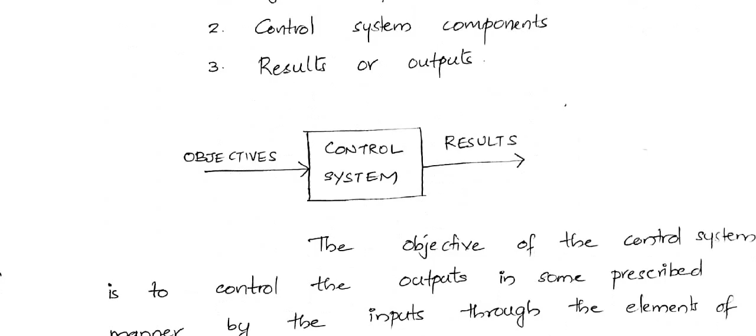Before going into the basic components of a control system, let's see what is a system and what is a control system. A system can be defined as a collection of components or elements that are connected together in a sequence to perform a specific task or a function. So that is basically a system. In a system, if the output quantity is controlled by varying the input quantity, then that system is known as a control system. So how will you define a system?

We can define a system as a collection of elements or components connected together in a sequence to perform a specific task or a function. And in a system, if we are varying the output quantity by varying the input quantity, or if we are controlling the output quantity by varying the input quantity, then the system is known as a control system.

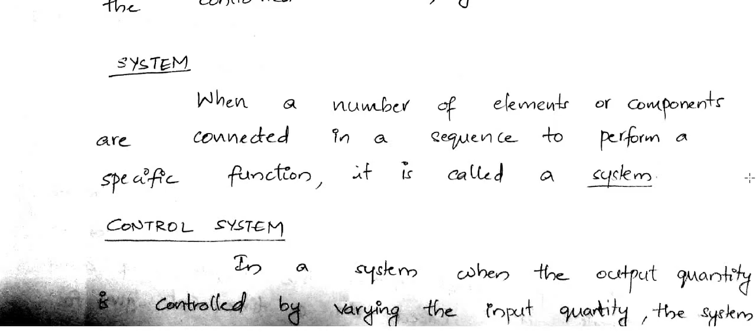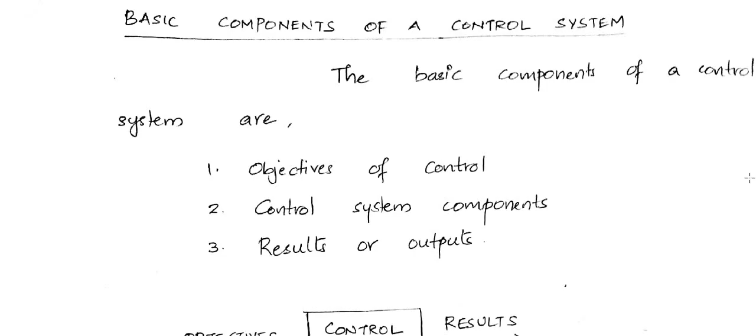So now let's see what are the basic components of a control system. A control system has three important components or three basic components, which are objectives. Objectives are nothing but the inputs. Then secondly, we have the components of the control system, and finally the results or the outputs.

So we have a control system, and we are applying the objectives, or the inputs, to the control system, and from that system we are getting the output or the results. So the basic components of a control system are objectives, which are also known as inputs or actuating signals, then the control system components, and finally the results or the outputs. So these three are the basic components of a control system.

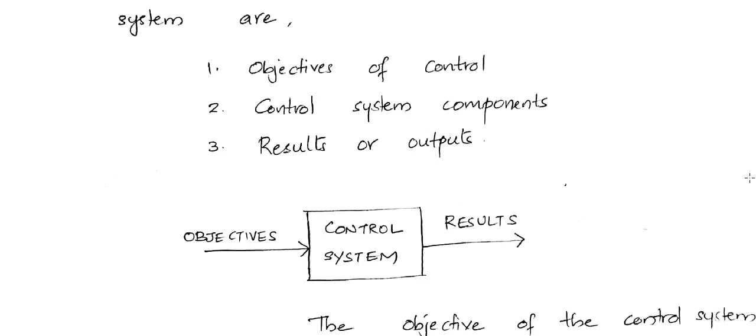So we have seen what is a system, what is a control system, and what all are the basic components of a control system. Now moving on to the next part, applications of control system, or examples of control system. You may be asked to list out the different applications of control system, or write the different examples of control system. For both, you can go for the same answers.

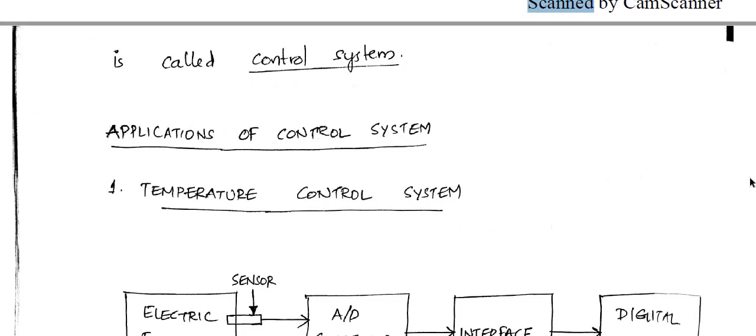First one, a temperature control system. So here you can see an electric furnace. We are trying to increase the temperature of that furnace, or we are trying to control the temperature of that furnace. Through a relay control circuit, we are applying AC. So we are applying that voltage to the heating element of the furnace. Obviously when we apply that supply, the heating element will start to heat, and as a result its temperature will slowly increase.

We have placed a sensor over there to sense the temperature, and the temperature is being converted into a digital quantity so that we can display that temperature in the digital display. This is some sort of control system we have, but we normally say that this control system, this temperature control system, is an open loop system. So why do we say that it's an open loop system? Because we cannot automatically correct the temperature.

So that's why we say it's an open loop system. Actually, there are two types of control systems: open loop control system and closed loop control system. We'll discuss all those in detail. So this is a kind of open loop control system. We are just applying AC supply to the furnace through a relay. When we supply that AC, the temperature of the heating element will slowly increase. With the help of a sensor we are measuring that temperature, and it will be in analog nature, so that is converted into digital with the help of an analog to digital converter, and that is being interfaced to a digital display so that the digital value corresponding to the temperature can be displayed.

See here, this is a kind of closed loop temperature control system. The difference we have made is we have added a controller over here. To the controller we will give the desired temperature, or the reference temperature. So this is the temperature that we need in the electric furnace.

The controller also accepts a signal from the furnace side, which represents the actual temperature in the furnace. The controller will compare the actual temperature in the furnace with the reference temperature we have given. Based on the comparison, the controller will generate an error signal, and that error signal is fed back to the relay circuit, which can be used to switch the relay on or off.

Suppose the temperature in the furnace is higher than the desired temperature. The controller will generate an error signal, and that error signal will be used to switch off the relay. If the relay is switched off, then automatically the supply to the heating element will be switched off.

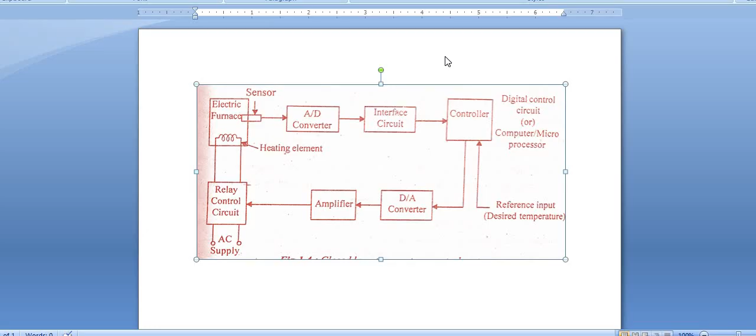So slowly the temperature in the electric furnace starts to reduce. After some time, when the temperature becomes lower than the desired temperature, based on that comparison the controller will again generate an error signal, which is fed back to the relay circuit, and now this signal will switch on the relay. This automatic switching on and off of the relay ensures the temperature in the electric furnace stays at the desired value, keeping a constant temperature in the furnace. This is how we make a closed loop, or automatic, temperature control system.

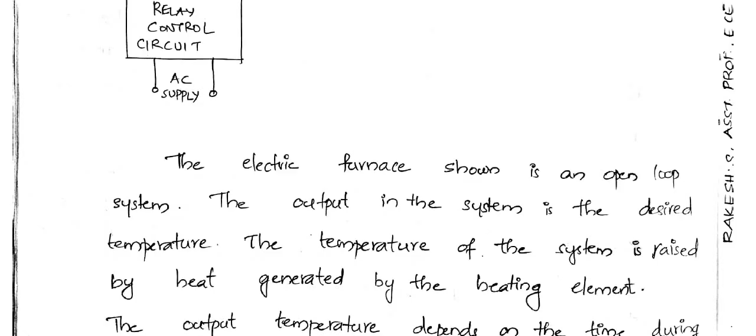Now we'll go to the second example or application. This is something you all know - a traffic control system. Our normal traffic control system is an open loop system, because it's based on a timer. Based on the timer, it will open a particular lane and close other lanes, and after a particular amount of time it will open the next lane and close the others, likewise.

We can convert this kind of traffic control system to an automatic, or closed loop, control system by measuring the amount of traffic in a particular lane, maybe with the help of a camera. If the traffic in a particular lane exceeds a particular limit, we can open up that lane and close the other lanes. Likewise we can convert the normal traffic control system to a closed loop control system.

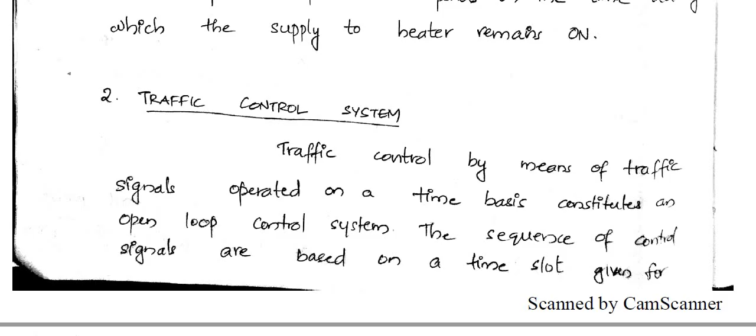Steering control of an automobile: the movement of the tires is done with the help of a steering wheel. We control the steering wheel, rotating it, and based on the direction of rotation, the tires or wheels move accordingly. So we are controlling the direction of the wheels, and that can also be considered as a control system.

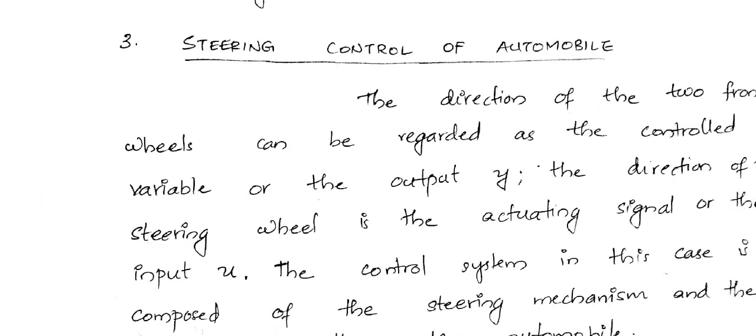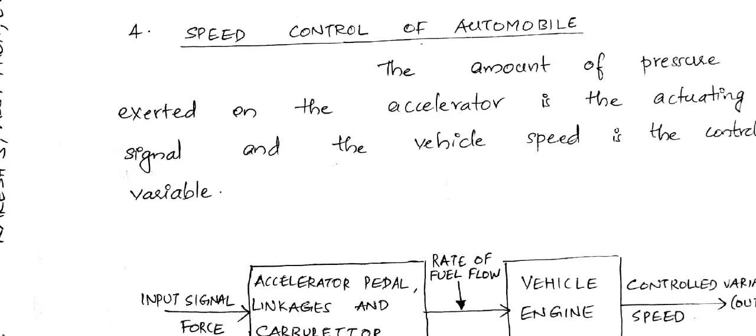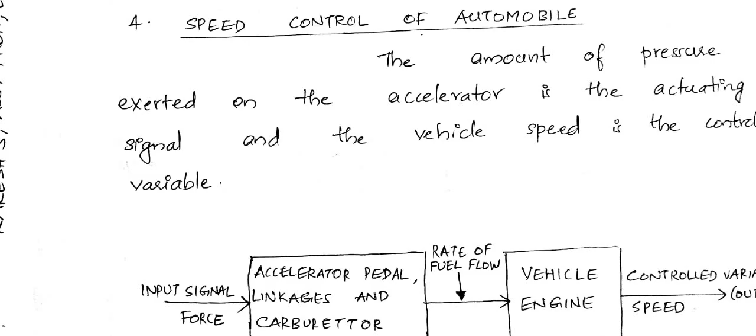Then, speed control of an automobile. How do we control the speed? It's done with the help of the accelerator - we press the accelerator, applying a force on it, which changes the rate at which fuel flows. Based on that, the speed of the automobile changes. So in this case, the input is the force we apply on the accelerator pedal, and the final output, or controlled variable, is the speed of the automobile. Controlled variable means the output itself.

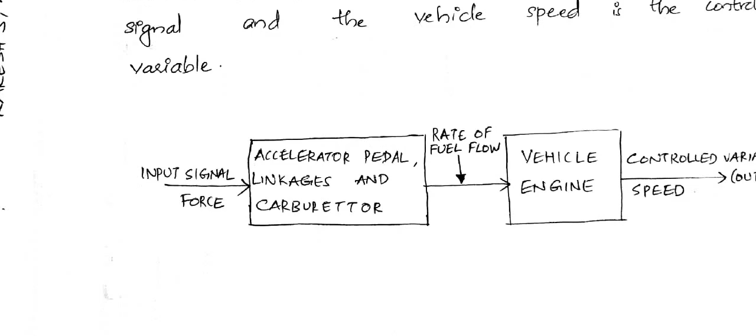So these are the different applications or examples of a control system.